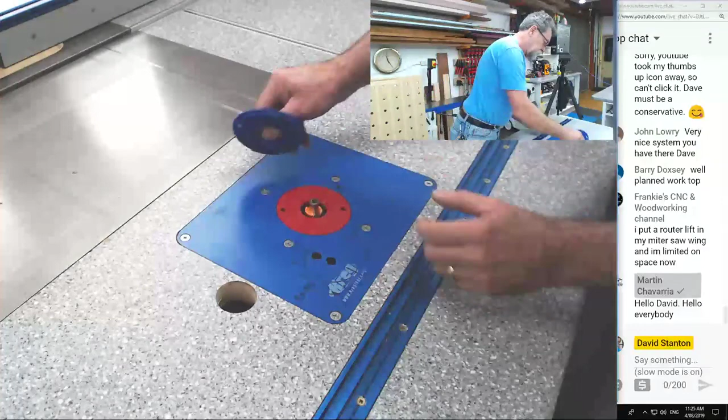And you're going to say, yeah, good on you, Dave. What is that? Well, let me just check that I've got all the slots cleaned out. Yes, they are. So this is a rotating dust shroud that locks into the top of this.

Now, undo that one, take her out, pop this one in, and lock.

Now, that will move wherever I want it to as a dust shroud, as I'm putting a large piece over. See how it just moved out of the way then? Wherever I put this, it will follow.

So as I'm coming past, beautiful. So the cutter is turning this direction. And you see how when I pushed it up against there, this is following against the edge. So it's restricting the amount of open. It can go to there, of course, and that would allow a little bit of dust to go out. But as soon as I move this around, I'm back to there. And how nice is that?

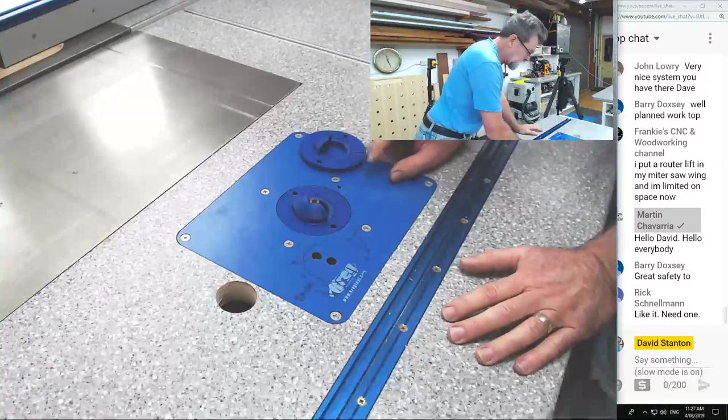So that's one, that's for 180 degrees. Now, the one I'm going to demonstrate on, I thought it might be an idea if instead of just doing 180 degrees, we do one at 90 degrees. The reason that one's there is if I want to go into internal corners.

So let's take that out. And I'm just checking this, sometimes the printing is leaving residue. See, just here, you may or may not see it. There's just that little bit of residue from the print left there. And that's fine, I just want to get rid of it.

Where's my knife? I'm just going to get a Stanley knife. Got it. Okay.

So here we go, we've got that. As I say, it's just every now and then, with any 3D printing, you might get a little bit of residue in there. That's fine.

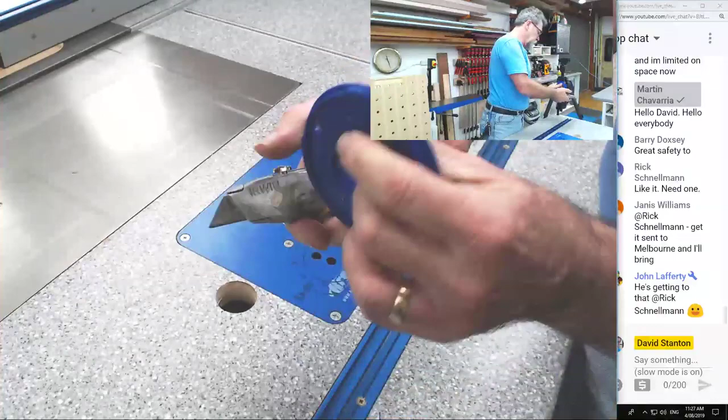So now I can drop that in here, get the clamp, or the tool that locks it up, tighten her up. Beautiful. How cool is that?

All right, now where's that stick that I've got? This is what I'm talking about - 90 degrees. I want to follow there and then back out there.

Well, this one would have held me out. There's no way I could have done it. But this one, I can slide in and then back like so.

And I'm going to demonstrate it. So let me get my stuff together here. I've already set that at the right height. I'll make sure that the router is going to work all right.

Yes, going to work fine. And how about we turn the dust extractor on in the right area?

Are you enjoying what I'm doing today? I have to apologize for being crook. You know, it's just one of those things I had no control over.

I'll make sure that I've got the dust port open there. That's closed, all that's closed. And that one's open, good. So I'll start up the dusty, as you know I do with this thing.

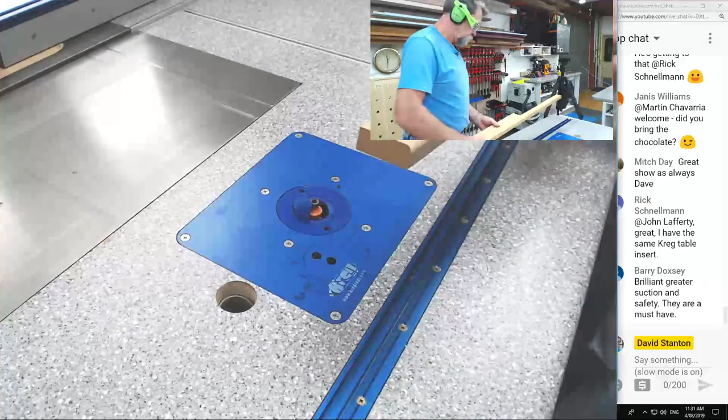Now I'll let you know, I haven't used it yet. So this is cool, see how we go. There's the roundover. How nice is that? It works. What can I say? Let's turn some things off.

Beautiful. All right, so now I'm going to spin this around again to there, and hopefully that'll work. And switch the cameras back to the main camera and the chat and do the transition. There you go. Easy, easy, easy little thing.

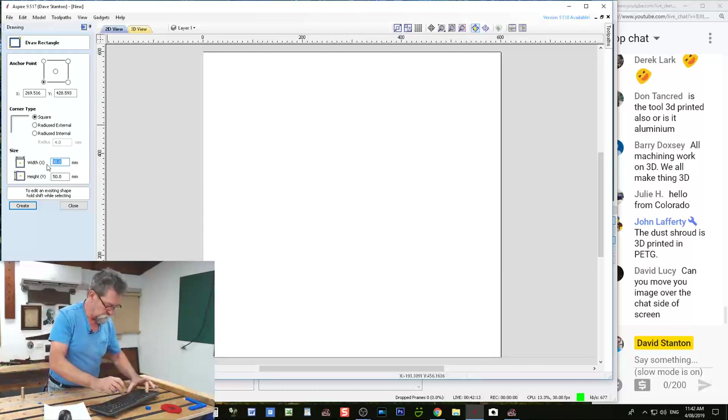Now I want to show you how easy this is. Let's create a rectangle. I'm going to left click on the mouse, I'm using a PC, not Apple. So I'll left click on create a rectangle, and it's giving all these coordinates it wants to use. I don't want to put it there. I want the rectangle to be, let's say, 300 millimeters wide and 300 millimeters high. Okay, I'm going to click here, and there it is.

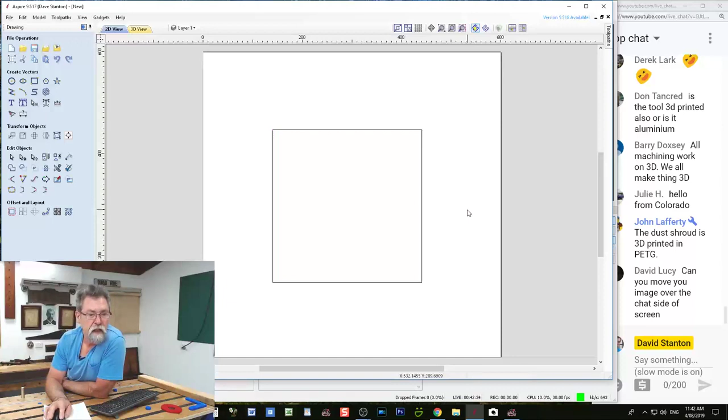We'll close that. So now I have this vector, and if I left click anywhere else on the screen... can you move the image over to the chat side of the screen?

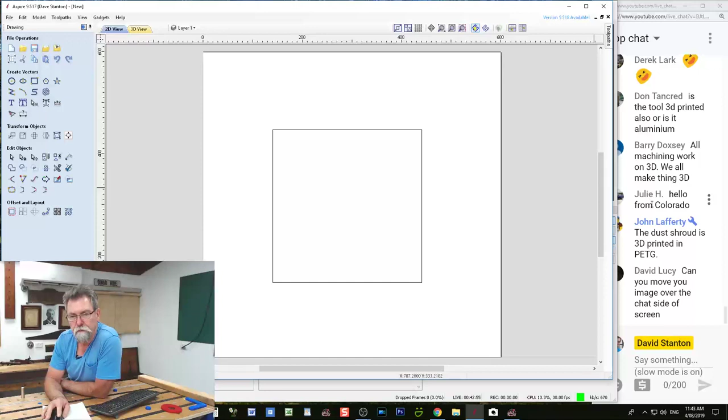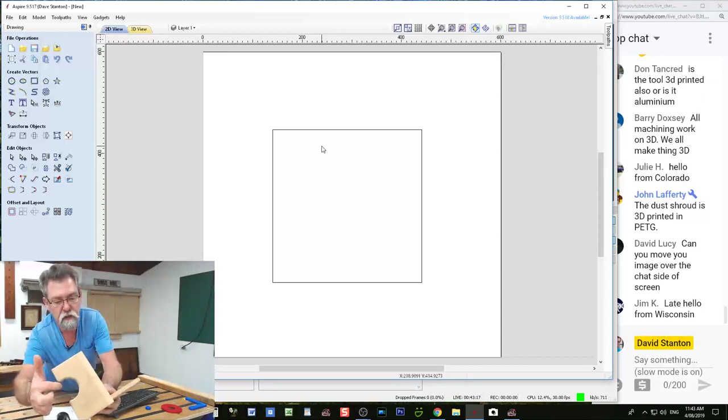So here we go, we've got this square. Now, let me get this back over here so you can see what I'm talking about. I did mention this circle coming into a rectangle, and that's an awkward one to line up manually to get the vectors to actually lock onto each other.

It's okay now, just not at the beginning. Okay, not at the beginning, I can see it clear on a laptop monitor. Okay, all good, so here we go.

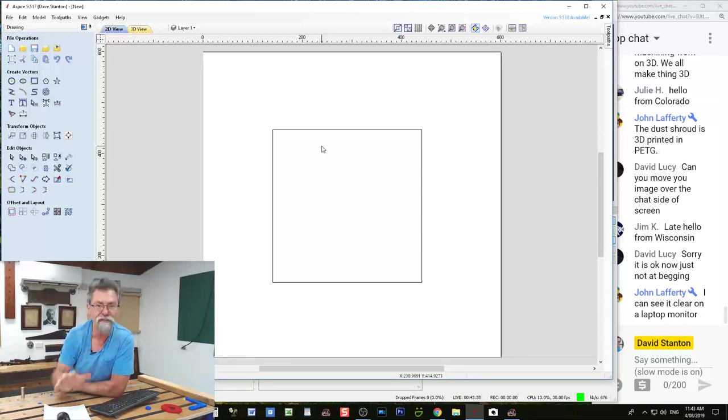Now I'm going to create a circle. So left click on the draw a circle tool, and it's got a diameter of 100 millimeters. Again, it's got coordinates there that if I really wanted to be precise, I could use. But what I'm going to do instead is some smart snapping.

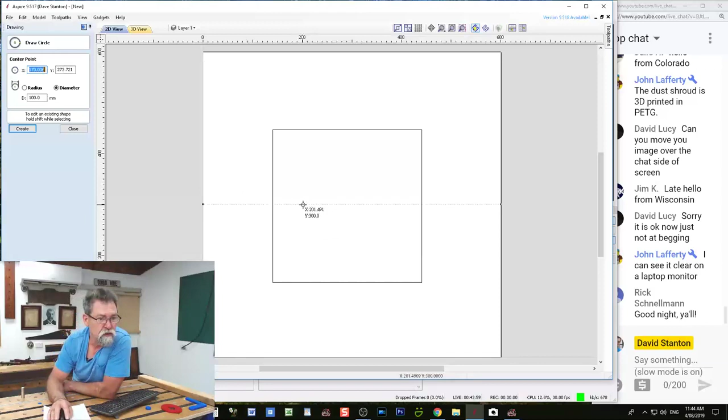I'm going to left click there. Now it's not over far enough, so I'll get rid of that and do it again. How I get rid of it is push the delete button, and it's gone. Go back to the circle, and come in a little bit closer. Click there. Now I've got an intersection, so put the vectors to sleep.

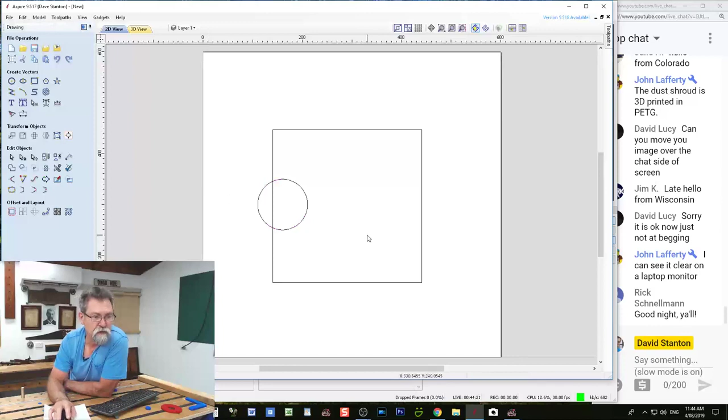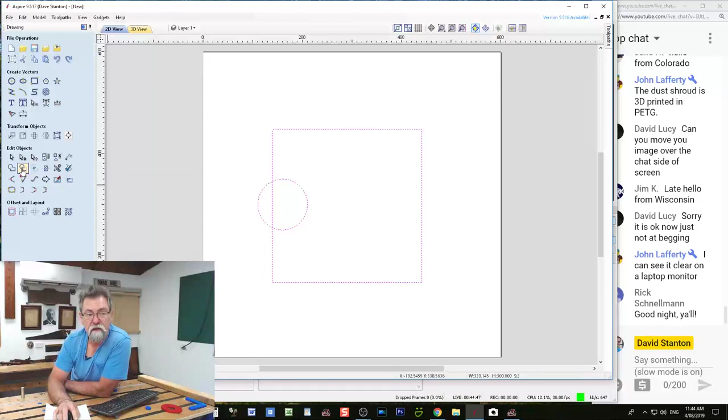So I have a circle and a square. I want to create this as one vector. Now what I can do is highlight those two vectors by left clicking and dragging over them, and so they've both been woken up. Over here we have 'subtract second selected vector from the first.' If I left click that, it's made that one vector - it's welded it together and got rid of all the other stuff I didn't want.

Okay, now what we're going to do is use the tool I was talking about. This guy down here is the fillet.

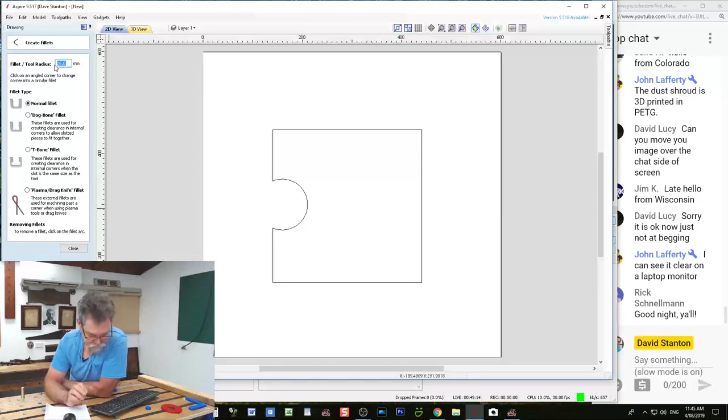I'll left click on that, and I'm just going to muck around with normal fillets at the moment. So here is the radius. Let's make that, say, 6 millimeters, or 6.35 - let's make it a perfect quarter inch, which was the radius I was using for the router cutter.

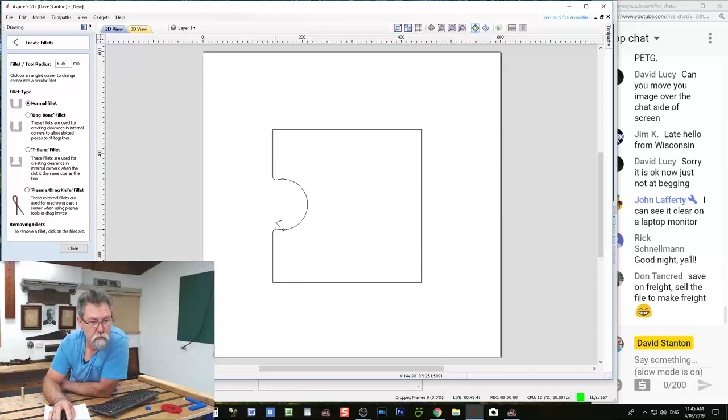Now all I do is come down, see that little arrow pops up? How cool is that? Down here till I see the arrow, and there it is. Now I can get rid of it by left clicking again when the cross is on it, and it says goodbye, I don't want you there anymore. But I can come back and let's put it back on.

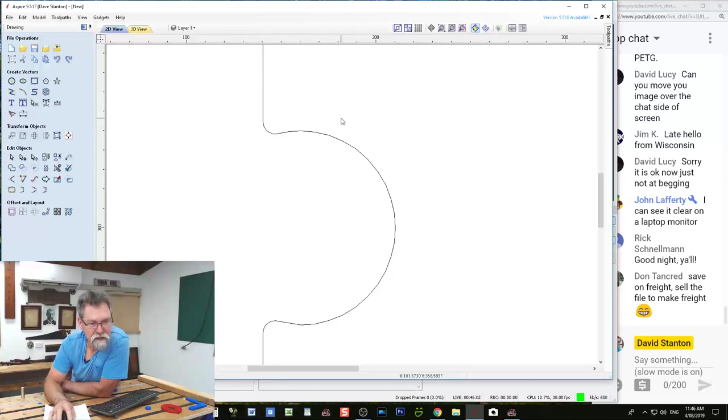And we can see when I increase the size of what I'm doing here, that was a whole lot easier than trying to find the tangent and the perpendicular from there and try to get an origin point for a circle there. Fillets are my new best friend.

So now I want to put a fillet here too, because I'm thinking, you know, that looks okay, but how about we do something of a good size? So let's do something close to 1 inch, 25 millimeters, and then come up to here and say, there's the fillet. Now a lot of people are going to say, you know what...

This is a lot of mucking around, but see, I can now punch this out on the CNC, and I can use that as a template for the traditional way of doing things by cutting it out with a jigsaw or a bandsaw, and then gluing the template or sticking the template down onto my workpiece, which might be 2 inches thick, and then run it over the router table using John's dust shroud with a pattern follower.

So double bearing spiral up cutter is what I use for that kind of stuff. And I keep telling people, it is a router, it's a woodworking tool, except instead of holding onto it, I'm directing the machine to do it via the computer, the stepper motors, and the router there. So it's just a different way. It's still another tool.

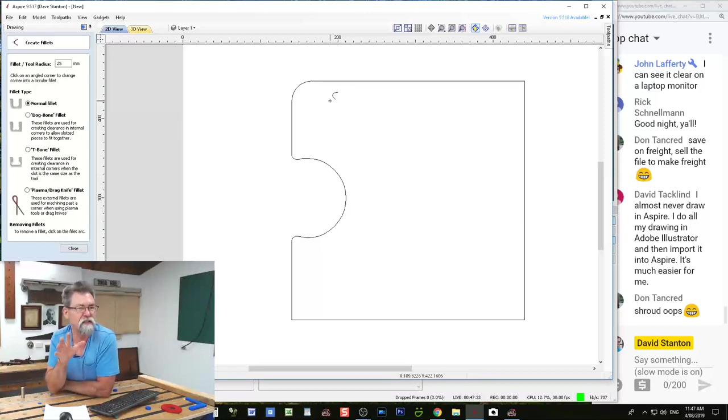All right, I do all my drawings in Adobe Illustrator and then import into Aspire. It's much easier for me.

Well, I get that, it's what you're comfortable with. But as I said at the beginning of the show, I was given Aspire by Vectric because I am labeled an influencer, and so this is the thing that I'm learning. So I'm just sharing with you as I'm crawling. I don't learn this very quickly, but it's so much fun learning it.

All right, let's do another one. Let's get rid of that one and do a monster 25 millimeter there. How cool is that? That was just so easy.

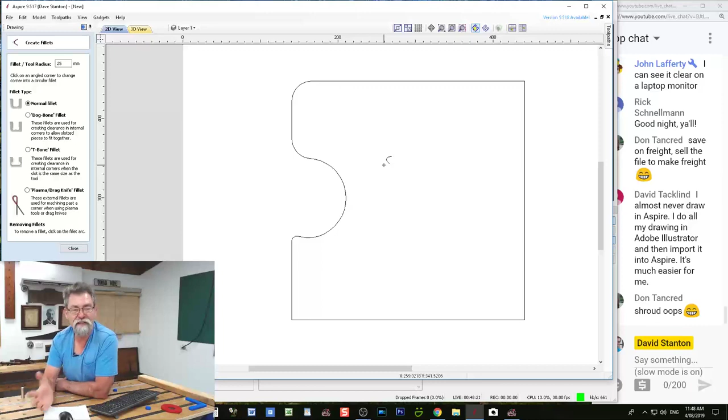Now, let's close - left click on close, and we're going to go from CAD, which is computer aided design, over to the other side, which is computer aided machining, CAM. So there we go. This is what's called a vector now, so I have that vector, all continual dotty marching ants lines.

Let's say I want to cut it out. So I'm going to left click on a profile toolpath, and I want to go half a millimeter through the job. Remember, this board, my workpiece that I'd be cutting this out of, is 18 millimeters thick, so I've told it to go 18.4, and I'm going to use a 6.35 millimeter cutter, which is a quarter inch end mill, basically a spiral up. And I'm going to cut on the outside of the vector, going around the outside.

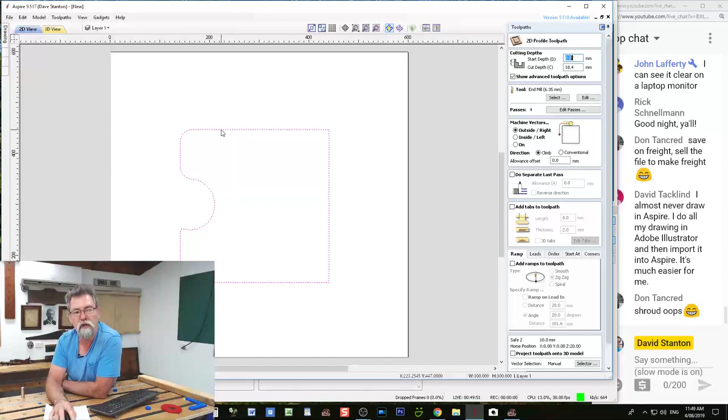And I'm going to go in this direction, which is called climbing, not conventional. If I was using a handheld router, I would go this direction because the cutter is turning this way, pushing into the job. But going climb, what happens is as I'm going this way, it's wanting to race ahead, but it can't because the machine's got a hold of it. It's a much cleaner cut - as the cutter is turning down, it's pulling the timber down into itself, so basically the job is its own sacrificial piece. It's not tearing out the other side.

So this is another advantage of the machine.

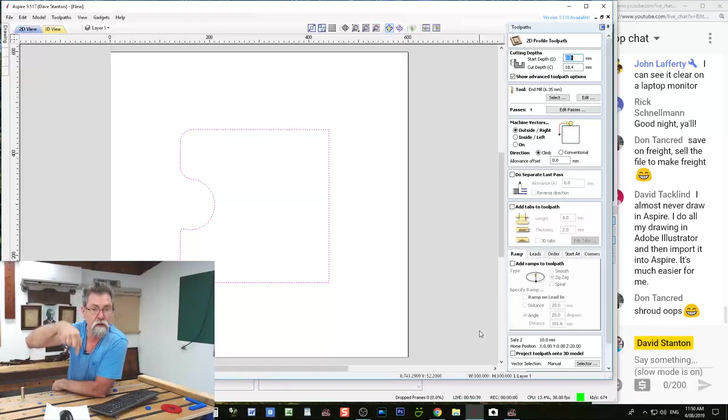So I'm not going to do any offsets, I'm not going to do a separate pass at the end, and I'm not going to add any tabs at this stage because this is only a demonstration. I'm not going to ramp it, which means the cutter, instead of just going and doing a cut, travels in at an angle and then does the circle, then another circle. I've told it to do 4 passes. Its safe Z position is 10 millimeters above the job, which means the router will come up out of the job and give it 10 millimeters clearance above the job before it moves to the next part to go down, so you don't drag it through and destroy the job.

Are you finding this interesting? I know some people will be going to sleep and they'll say this isn't woodworking. I understand that.

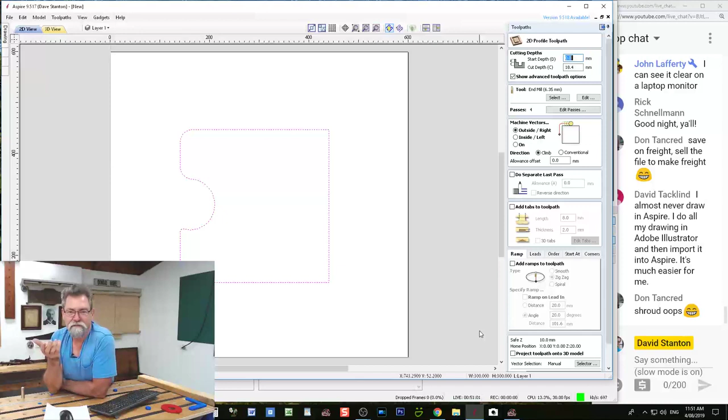It's basically going from steam engines to electric. It's progression. Why not? Okay John, thank you.

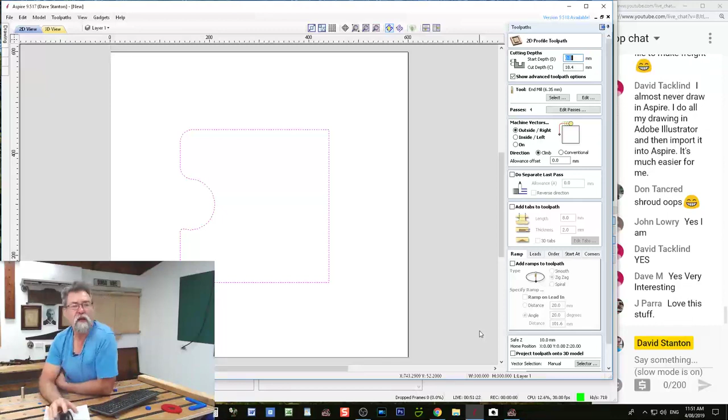Okay David, thank you. As I said, some people will be interested, some people will just, their eyes will glaze over, like Rick, I think he's gone. He's got no interest in it at all, and I understand. I'm getting a little bit of a leaning kind of mark in my arm. Fun stuff. You're enjoying it, Peter.

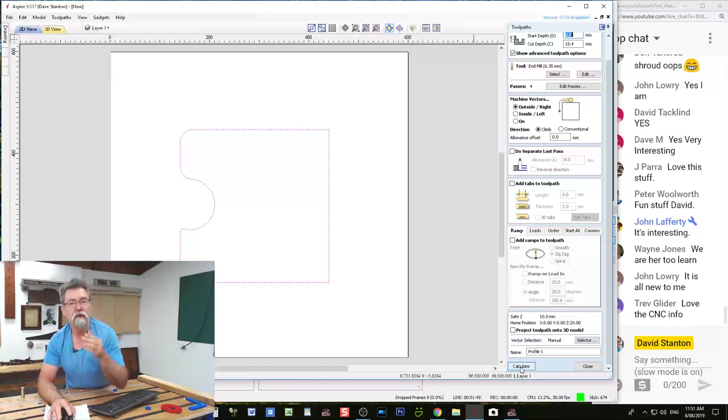Now, here's the fun part. Now I'm going to tell it that I'm happy with all of that, and to calculate it. When I click the calculate button, it's going to warn me, because I've told it to cut 18.4 millimeters deep, that I'm going to go through the job into my spoil board. This is the base board underneath the job that's on the CNC machine.

Calculate, left click. Straight away, see that? Material thickness 18, maximum tool depth 18.4, will cut through. Thank you, Aspire. Thank you for letting me know.

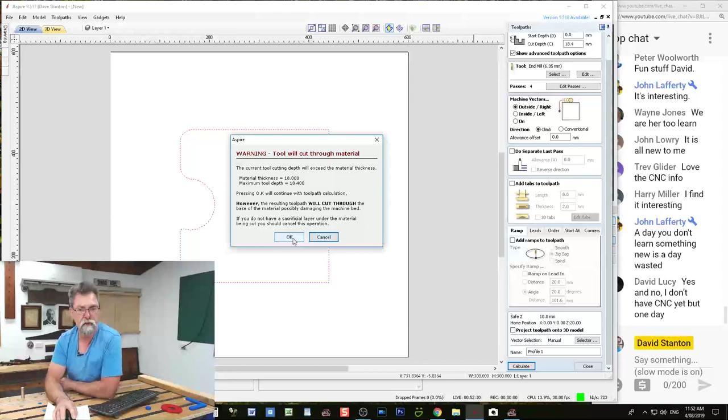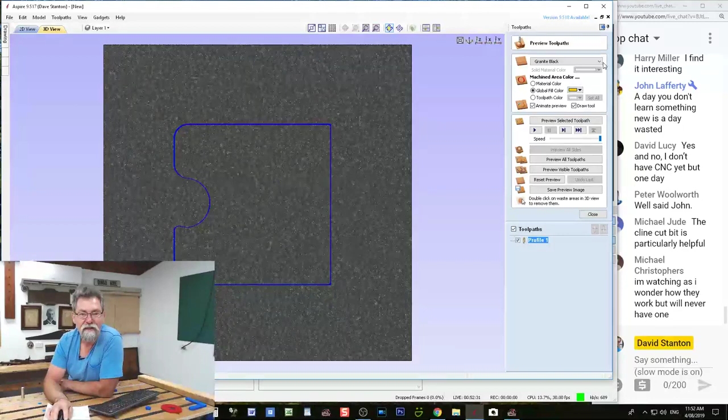Now, I told you to show it up as pine, not MDF. I can select whatever I want to see it in over here. I could do it in brass if I wanted to, or maybe in granite, or let's see what else, blue plastic. There's all of these things it lets me see it in, and it's just fantastic.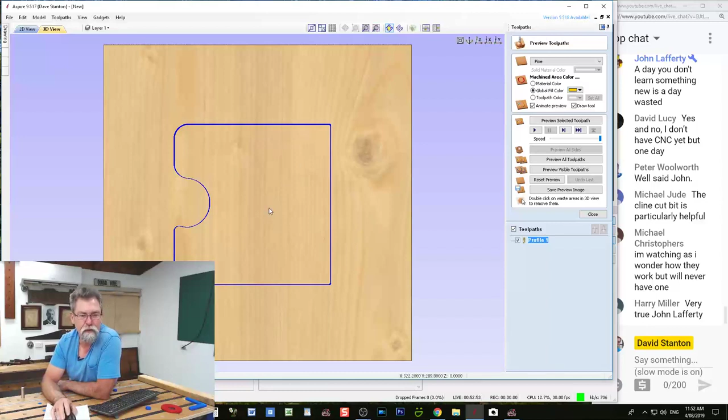So I'm going to go back to pine, because pine's pretty easy to see. Now I'm going to increase the size of this image a little bit, and I do that by pushing down on the scroll wheel on my mouse and rolling it forwards, and that, per click, makes it larger so I can see it.

I'm watching as I wonder how they work, but we'll never have one.

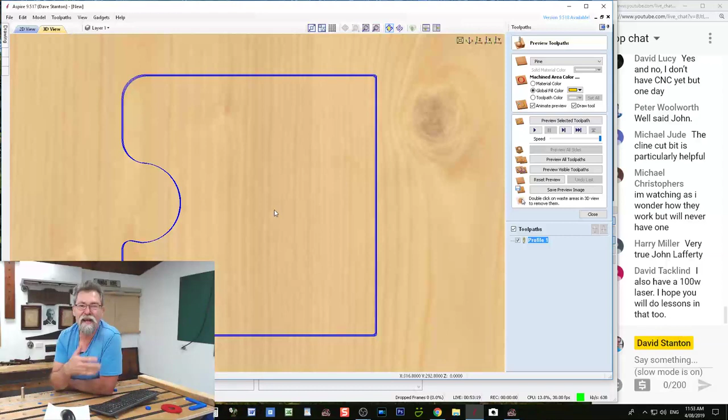Well Michael, that's fine. If you're curious about how they work, that's one of the things I do, I love to share information. And if you take something away from today and never get a machine like this, but if you go to a show and see someone with a CNC machine working and showing it, you're not going to stand there and be ignorant. You'll be able to look at it and go, I know what's happening here. And that to me, that's an absolute joy.

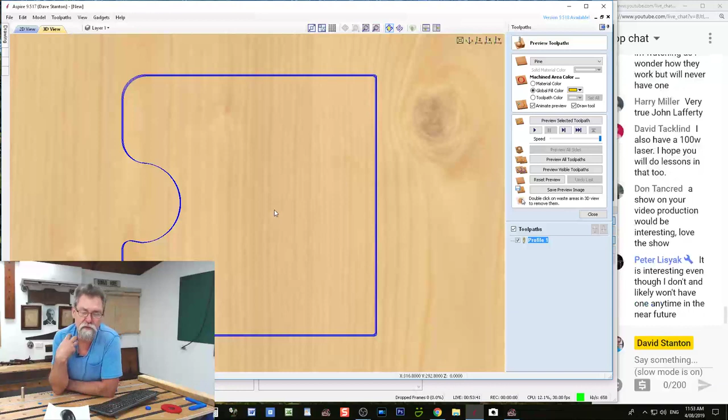It really is. Okay, now what I've got is this profile, and if I click up here on the left-hand side for the 2-dimensional view instead of a 3-dimensional view, it will show me the toolpath and the direction the machine is going to travel around the board. It's going to start here and go around this direction. As I said, this is a climbing cut.

Very important, the cutter is turning this direction as it's going along. The job itself is its own sacrificial board, it's cutting back into itself, not pushing it away from the job and tearing out. Little things like this, I love it.

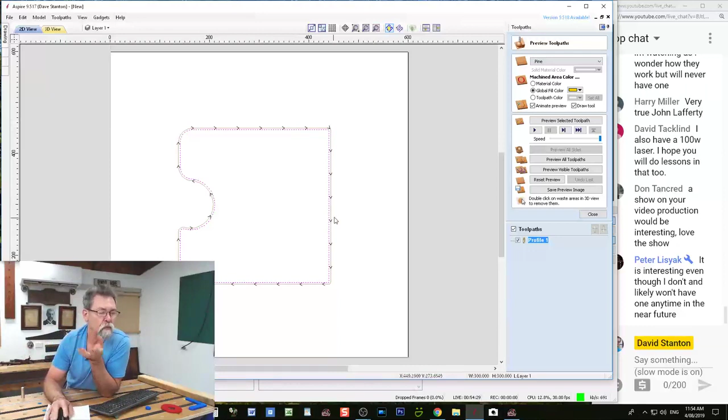Okay, so we can look at that and say that's fine. I'm going to go back to a 3-dimensional view now, and we're going to preview it. And I'm going to slow it down to about there.

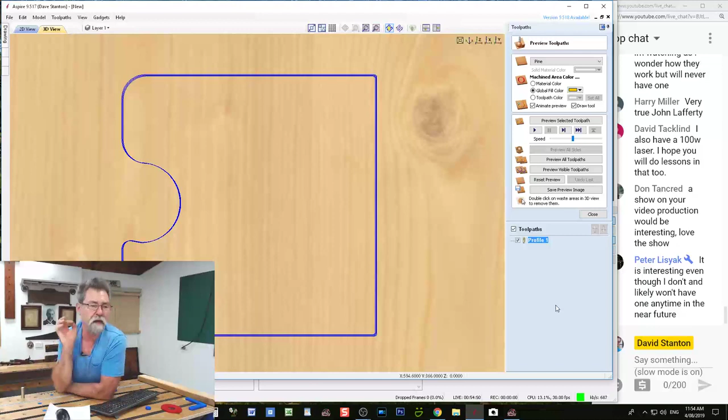Now, the reason I do that, otherwise it's just going to go zzz and it's finished and you won't see it. There's going to be 4 passes, it's going to go around, and right at the end, see how I've got here, the global fill color is yellow. That means if I can see yellow at where that blue line is now, or just outside of that blue line, I've cut all the way through. So let's have a watch.

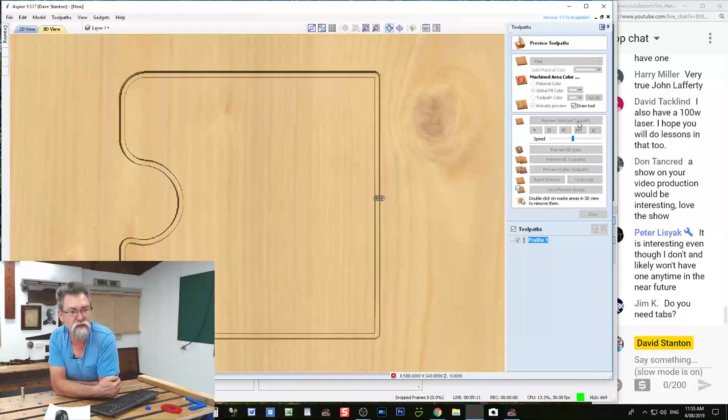This is the router going away. That's the 2nd pass, 3rd pass, and now the last pass.

Oh, actually it's not going to show me the global fill color as yellow, it's going to show it as mauve. All right, my bad.

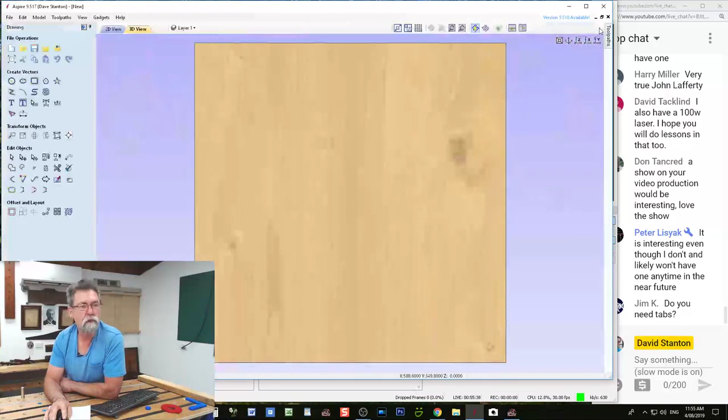Do I need tabs? Let's do that, let's go back and throw some tabs in. So I'm going to go out of here, back over from computer aided machining to computer aided design. And I'm clicking on the 2D view, and I see everything is good there. Then I'm going to go back again over to the machining.

Now I'm going to double click this and say add tabs, this area down here. Now I'm going to edit the tabs. The tabs are 8 millimeters long by 2 millimeters thick, and they're going to be at the bottom of the trench.

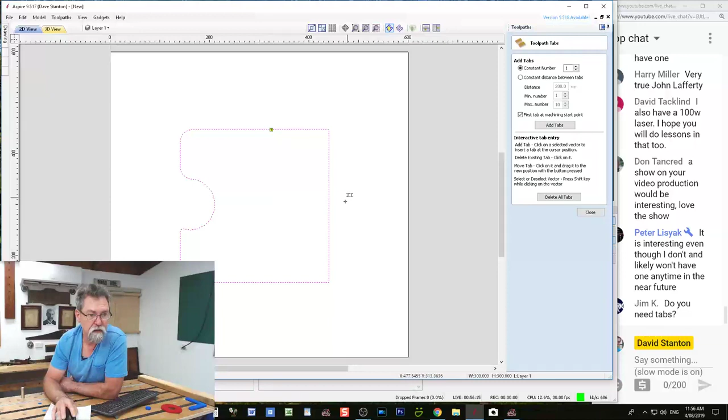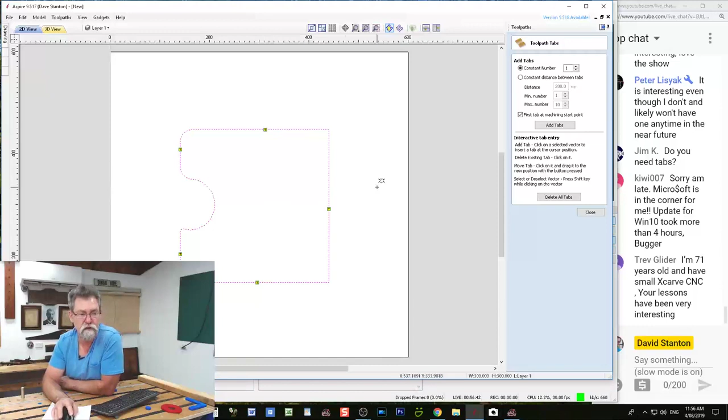So I'm going to add tabs simply by left clicking on the job. I don't like doing it on curves, so I will put it there and there. Now these are going to leave little areas where it's still going to retain this board inside the job. I can get rid of the tabs simply by left clicking on a tab and it gets rid of it, same as I did with the fillets.

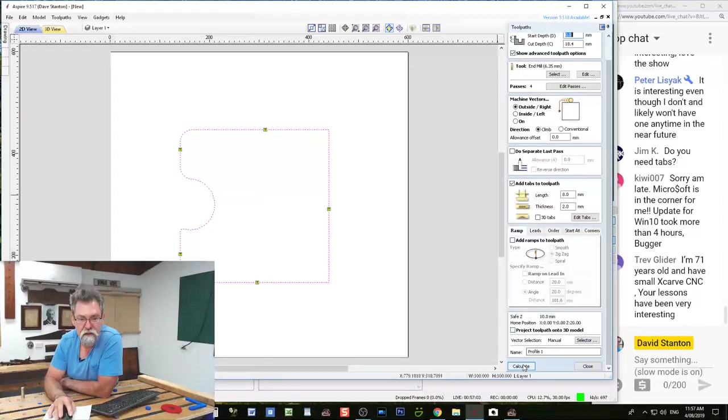Click on it once to put it there, click on it again to get rid of it. Okay, so 2 millimeters deep. The reason being, I'm going to go 0.4 of a millimeter deep past, so my tabs are actually going to be 1.6 millimeters thick by 8 millimeters long. Now let's have a look at that, we'll calculate it and we'll show you. Here we go, yes, as I just said, I'm going to go through 0.4 more, so it's 1.6 millimeters thick.

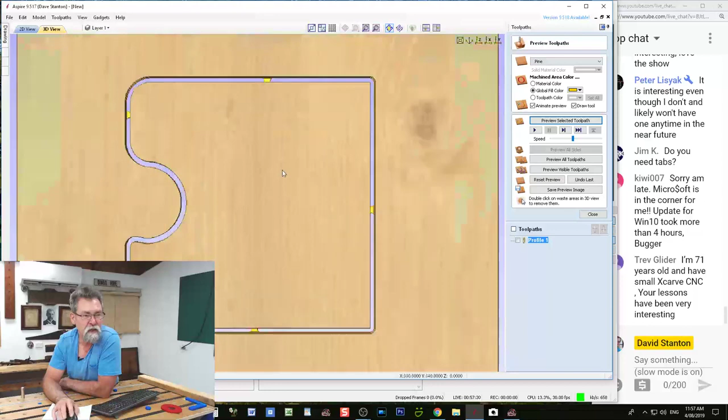And now let's preview. So we're going through and coming up for the last one. And there's tab, tab, tab, tab, and tab. See that? So the tabs are actually yellow. Let's have a look at that, you can see the tabs there.

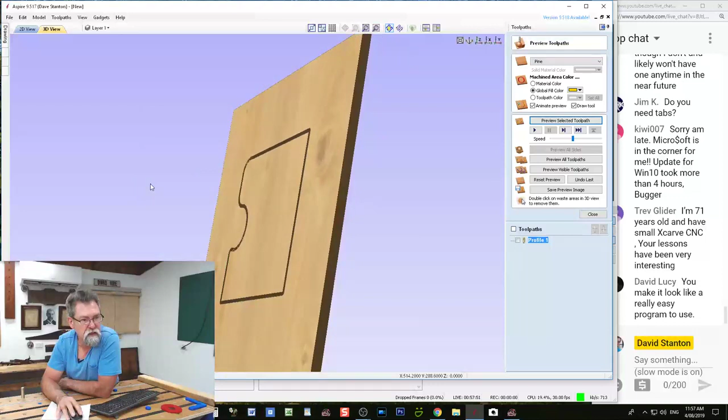Now what I can do also is drag back on the scroll wheel on the mouse, and now I'm going to left click and hold it down, and drag the mouse over left. You can see what I'm doing is I'm rotating the job over to see from the underside, and about there is fine. You can see there's the tabs, and that keeps David safe. That stops this thing or the cutter snapping, or this thing becoming a missile and flying across the room and smacking me in the head.

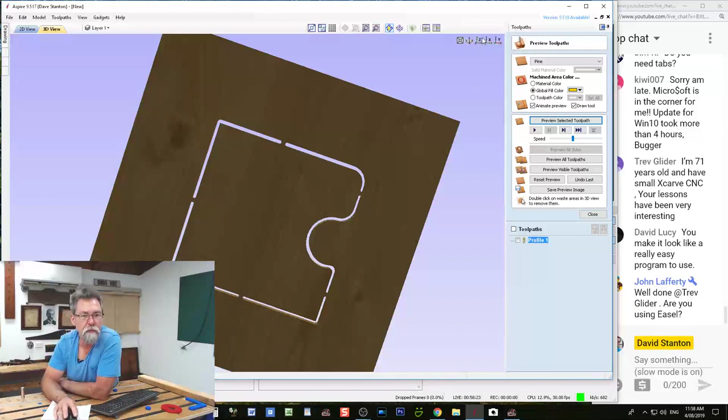If I want to see what it looks like again from above, this is God's view from the Z-axis. Up here got Z, X and Y. So let's have a look from the Z-axis, I'm going to left click on that and it takes it back to how it looks. I can look at it from the X-axis, which is across the front, and from the Y-axis, which is from the side. But that's boring, so let's go back to there. Or this one I think is 3D.

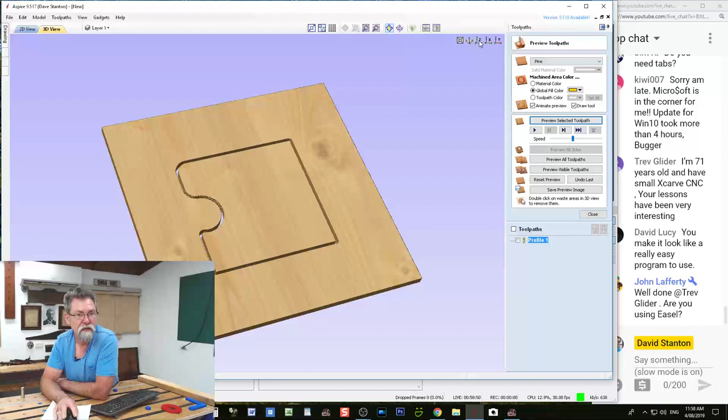How cool is that? And I can actually save this preview image by clicking there, and it'll save it as a JPEG. So there we go, that, my friends, is the end of my little Aspire fun. I don't want to save it.

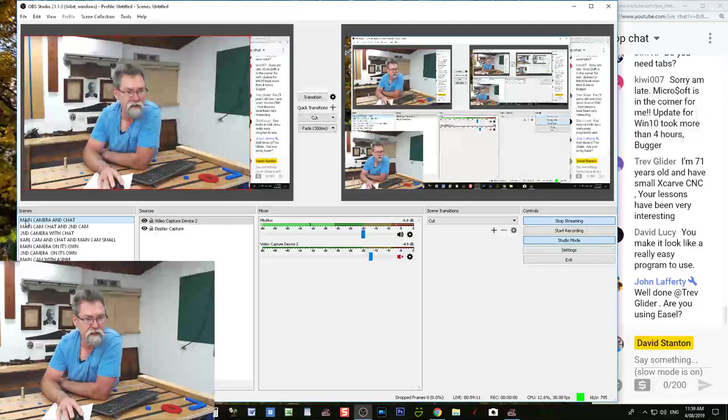And we'll go back to the main camera here and flick back to there. So what do you think? I stand up again, it's good fun. As I say, I love these things, you know, and I love the CNC.

Again, a year ago, if you said to me, David, I want to talk to you about a CNC machine, I would have run a mile. I used to panic because I didn't know anything about them. And people would come up to me at the store and they'd say, tell me about the CNC. Oh, geez, I don't know, I'll have to get someone for you. Hence, I don't like being ignorant about things. If someone starts talking about something, I like to be able to be involved in the conversation.